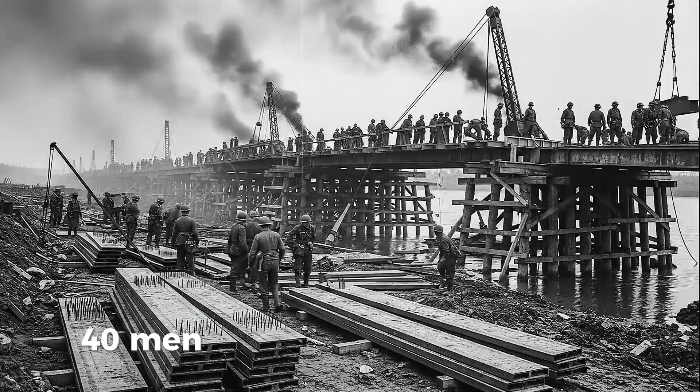June 7, 1944, 2:15 p.m., Bénouville, France. A 60-foot steel bridge slides across the Caen Canal while German artillery shells scream overhead. British Royal Engineers duck behind panels, hammers still swinging. Their commanding officer checks his watch.

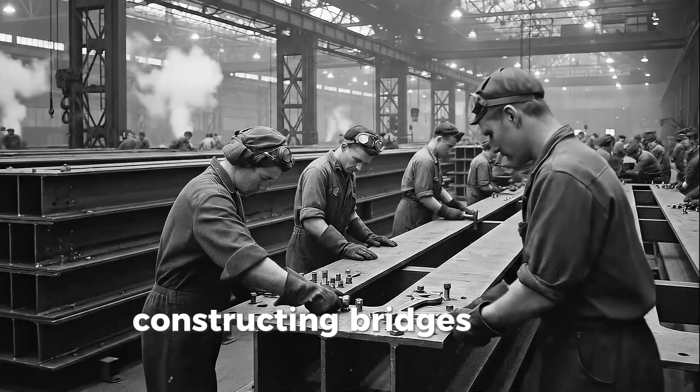But here's what makes this moment extraordinary: this bridge shouldn't exist. The technology to build it didn't exist 4 years earlier. Military doctrine said constructing bridges under enemy fire was suicide. Every military textbook of the 1930s declared it impossible.

Yet by the end of World War II, Allied engineers would build over 3,000 of these bridges, totaling 55 miles of roadway across rivers, valleys, and bomb craters. Field Marshal Bernard Montgomery would later declare, 'Without the Bailey Bridge, we should not have won the war.' This is the story of how one civil servant sketched a design on the back of an envelope and created the most important piece of military equipment you've never heard of.

A bridge so simple that factory workers with 0 engineering experience could build the parts, so portable that 6 men could carry each section, so strong it could hold a 40-ton tank, and so fast to assemble that combat engineers could throw it across rivers while bullets tore through the air around them. The Bailey Bridge didn't just change how armies crossed water, it changed how wars were won.

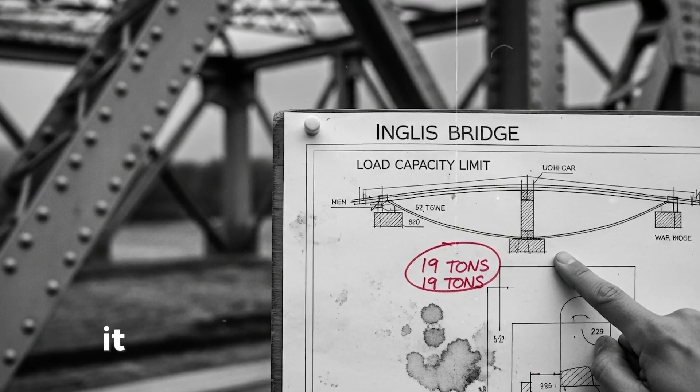To understand why the Bailey Bridge was revolutionary, we need to go back to 1939 and a problem that was keeping British generals awake at night. The British Army had a bridge called the Inglis Bridge, inherited from World War I, and it had one catastrophic flaw: it could only carry 19 tons.

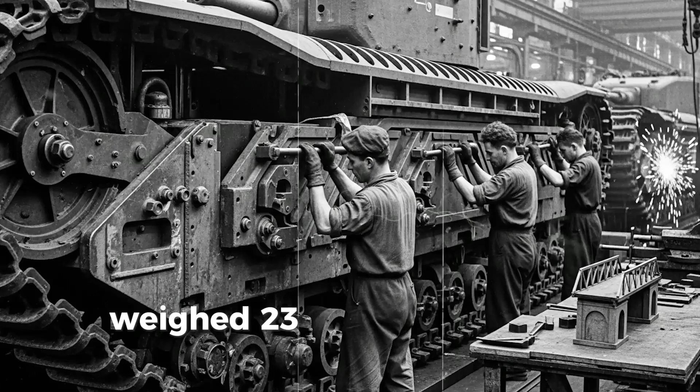That sounds reasonable until you learn that Britain's new Matilda tank weighed 23 tons. The Churchill tank, still in development, would weigh 40 tons. Every modern military vehicle was too heavy for the standard military bridge to carry. But the problem went deeper than weight capacity.

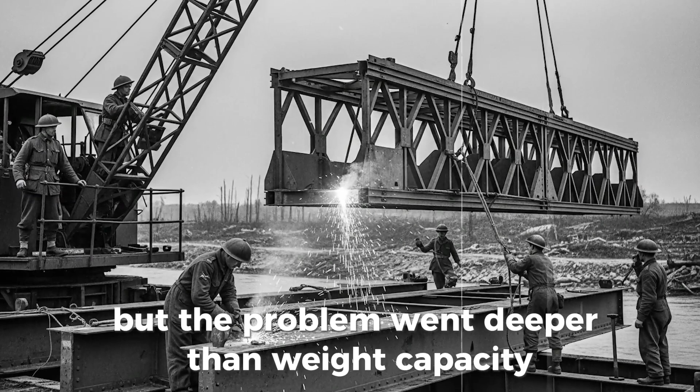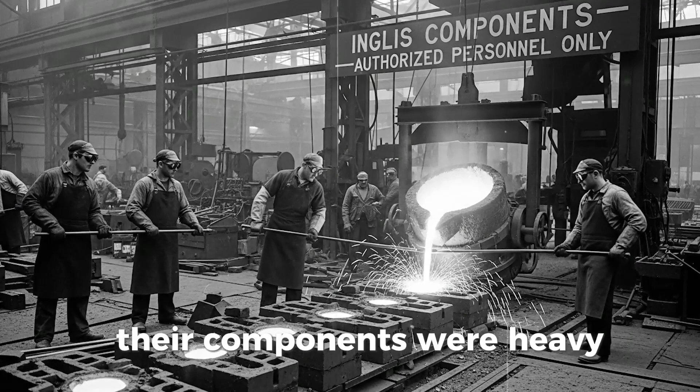Existing bridges required massive cranes to lift pre-assembled sections into place. They took days to construct. Their components were heavy, specialized, and could only be built by experienced steel fabricators. When retreating armies destroyed bridges, advancing forces faced a brutal choice: find another route or wait days for engineers to build a replacement while the enemy escaped.

In 1940, as Nazi Germany demonstrated the devastating effectiveness of rapid armored warfare, this became an existential problem. Blitzkrieg worked because German forces moved fast. If British and American armies couldn't keep pace, they couldn't win.

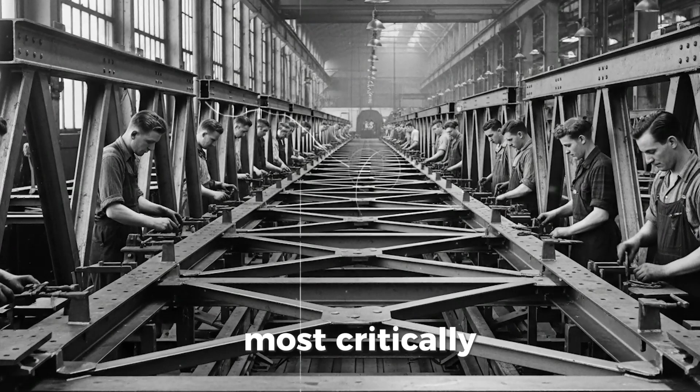The British War Office issued a specification that seemed impossible to fulfill. They needed a bridge that could be assembled by regular soldiers using only hand tools. Every component had to be light enough for men to carry without machinery. The parts had to be mass-produced by factories with no specialized experience. Most critically, it needed to be strong enough to carry a 40-ton tank across a 200-foot gap.

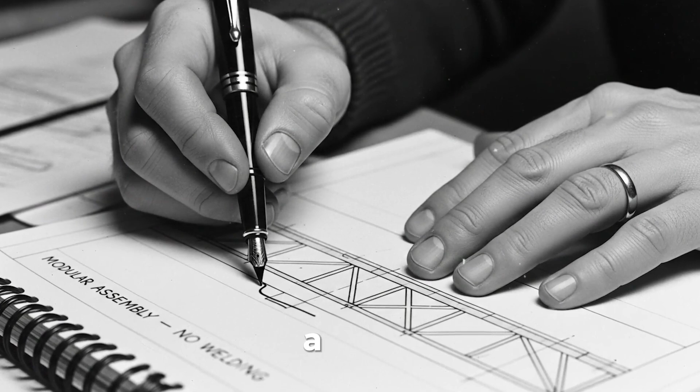Engineers called it a fantasy. One prominent military contractor told the War Office, 'What you're asking for violates the laws of physics.' But there was one man who disagreed: a quiet, unassuming civil servant named Donald Coleman Bailey, and he had an idea he'd been thinking about for years.

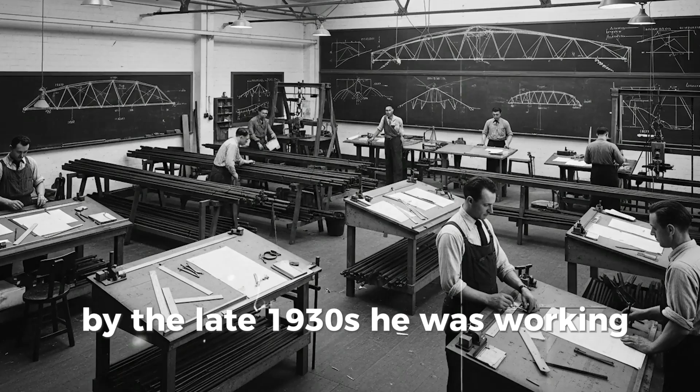Donald Bailey was born September 15, 1901, in Rotherham, Yorkshire. He studied civil engineering at Sheffield University and spent years working on reservoir construction. By the late 1930s, he was working for the Experimental Bridging Establishment, a small government research organization with a tiny budget and an impossible mission: modernize Britain's obsolete military bridging equipment.

Bailey was not a typical engineer. While his colleagues designed elaborate bridge systems using advanced materials and complex assembly methods, Bailey approached the problem differently. He asked himself, what if, instead of making the bridge more sophisticated, we made it simpler?

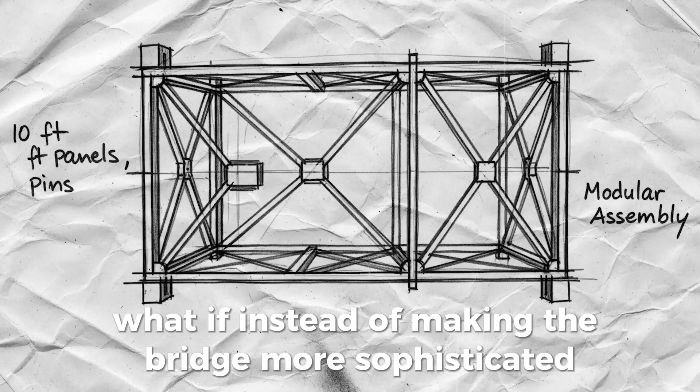The breakthrough moment came in 1940. According to witnesses, Bailey was being driven to a meeting of Royal Engineers when he pulled out an envelope and started sketching. By the time the car arrived, he had drawn the fundamental concept that would change military engineering forever.

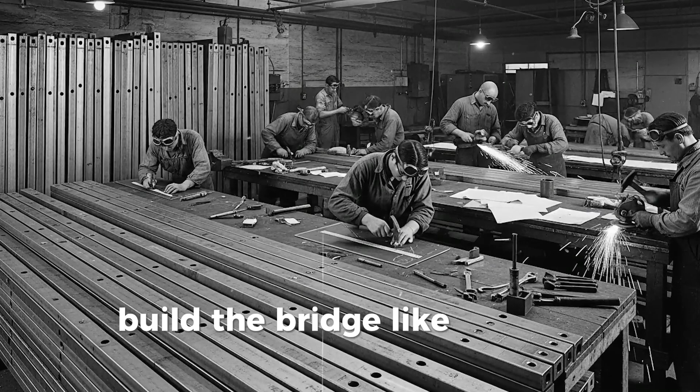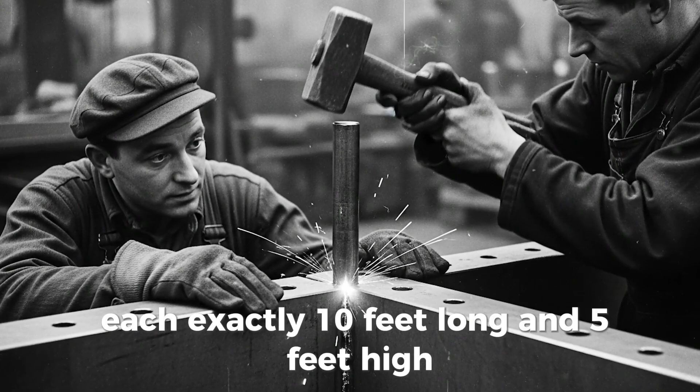His idea was deceptively simple: build the bridge like a child's construction toy. Bailey proposed creating standardized panels, each exactly 10 feet long and 5 feet high, made from welded steel in a cross-braced rectangular pattern. These panels would have holes at each corner. Engineers would connect the panels side by side using simple steel pins hammered into the holes, building the bridge's supporting walls. Wooden planks laid across steel transoms would create the roadbed.

The genius wasn't in any single innovation, it was in the system. Every component was interchangeable, every piece simple enough to mass produce, every part light enough for 4 to 6 men to carry. And most critically, the bridge could be strengthened simply by adding more panels, stacking them horizontally or vertically, depending on the load requirements.

The War Office was skeptical. One official told Bailey, 'It looks like something from a toy shop, not a battlefield.' But Bailey had calculated the load-bearing capacity down to the last rivet. On February 14, 1941, the Ministry of Supply gave Bailey an ultimatum: build a full-scale working prototype by May 1st, or the project would be canceled. Bailey had less than 3 months to prove his envelope sketch could become reality.

What happened next stunned everyone. Bailey assembled a team, including bridge designer Ralph Freeman, who had engineered the Sydney Harbour Bridge in Australia. Working around the clock at the testing facility in Christchurch, Dorset, they fabricated the first full-scale panels and built a test bridge across a field.

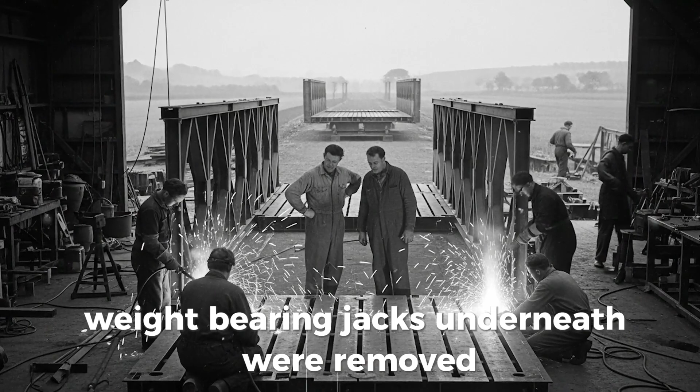Now came the stress test. Engineers drove a World War I Mark V tank onto the bridge and parked it in the middle of the span. Weight-bearing jacks underneath were removed. The bridge held. They loaded smaller tanks onto a platform built on top of the Mark V. The bridge still held. Finally, they filled the Mark V with scrap iron until it weighed far more than any modern tank. The bridge didn't budge.

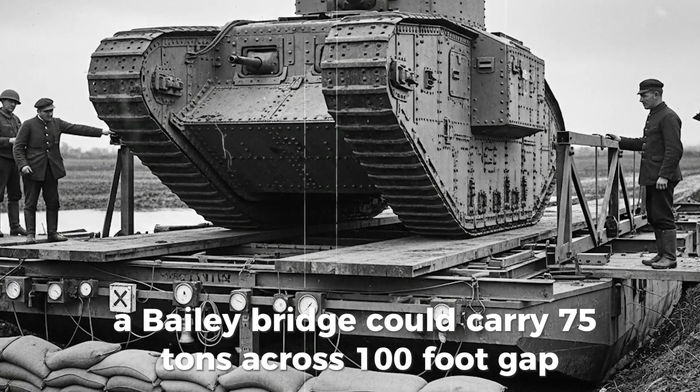But the real breakthrough came when they calculated the numbers. By stacking panels two high and two wide, a Bailey bridge could carry 75 tons across a 100-foot gap. Triple the panels, and it could support even heavier loads across longer distances. And because each panel weighed just 570 pounds, 4 to 6 men could lift and position it without machinery. Most critically, the bridge could be strengthened simply by adding more panels, stacking them horizontally or vertically, depending on the load requirements.

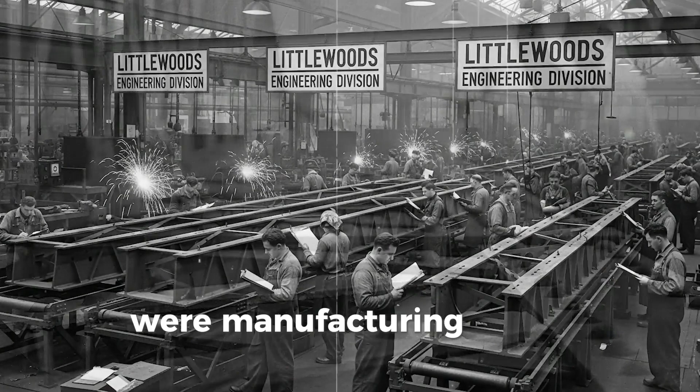In July 1941, full production began. By December 1941, the first Bailey bridges entered military service. Within months, over 650 British firms, including the Littlewoods department store chain, were manufacturing bridge components. Production eventually reached 25,000 panels per month.

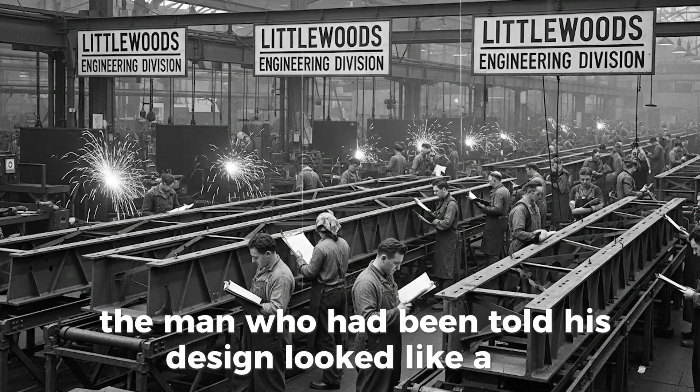The man who had been told his design looked like a toy had just created one of the most important weapons of World War II. And he'd done it with a sketch on an envelope and faith in simplicity.

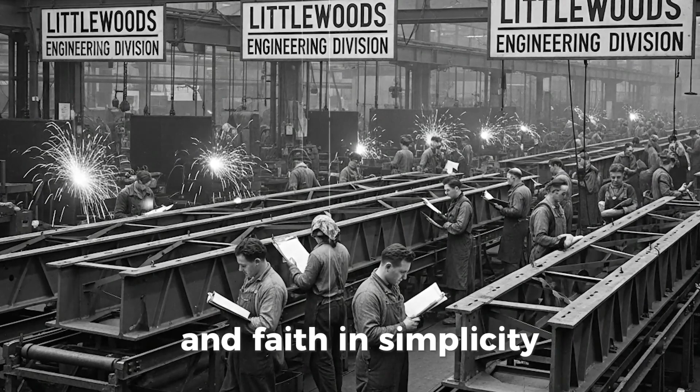The first operational Bailey Bridge went up on the night of November 26, 1942, over the Medjerda River near Medjez El Bab in Tunisia, built by the 237th Field Company of the Royal Engineers. But the first Bailey Bridge built under direct enemy fire came in Sicily, at a town called Leonforte, constructed by members of the 3rd Field Company, Royal Canadian Engineers.

German forces held the high ground. Machine gun fire raked the construction site. Mortar shells exploded across the riverbank, and yet the engineers kept building.

This became the pattern repeated hundreds of times across North Africa, Sicily, Italy, and eventually Western Europe. As German forces retreated, they systematically destroyed every bridge, mined every road, and turned every river crossing into a killing zone. The Wehrmacht's strategy was simple: if we can't stop them on the battlefield, we'll stop them at every river.

But they hadn't counted on the Bailey Bridge and the engineers willing to build it under fire. Edmund McNeill, a warrant officer with the 284th Engineer Combat Battalion, 9th Infantry Division, described the reality of Bailey Bridge construction under combat conditions. His words paint a picture far removed from the clean engineering diagrams.

When you're building the thing, the Germans are throwing mortar shells on top of you all the time. It wasn't a smooth operation. There was always a problem, especially when a plane came over and dropped a bomb on the damn thing, right when we were halfway through building it. Or they'd machine gun us, or we'd run into mines.

The construction process required brutal efficiency. Engineers would arrive at a destroyed bridge site, often still under German observation. While infantry units provided covering fire, bulldozers cleared approaches to the riverbank. Engineers laid out rollers, metal tracks upon which the bridge sections would be pushed forward across the gap.

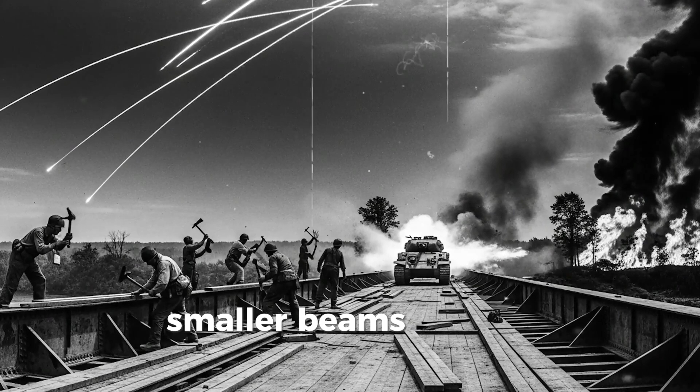The assembly began with the launching nose, a lighter angled section that would extend out over the water or gap. Behind it, crews assembled the first full section: 2 vertical panels on each side, connected by transoms, the horizontal beams running across the width. Stringers, smaller beams running lengthwise, were laid across the transoms. Finally, wooden chesses, planks 12 feet long, were placed across the stringers to form the actual road surface.

One section complete. Nine more to go for a 100-foot bridge. And the Germans are still shooting.

McNeill continued: All you'd hear, beyond the hammering, were the sergeants, 'Get that, wham that, hit that. Don't you know how to hit that?' The sledgehammers would be going like crazy. You're slamming pins in all over the place. You didn't have to tighten up any bolts or anything, you just bang them all in there.

But the real danger came from the relentless precision required. You always wore your helmet, always, because if you fell, you were falling on steel. A man would fall overboard. We'd get him and pull him up, and he'd have a bullet hole in him. That happened. German machine guns would wipe out 4 or 5 guys standing on the bridge.

The engineers developed brutal pragmatism. Work never stopped for casualties. Men would step over their wounded comrades to continue hammering pins. If a section was destroyed, they'd rebuild it immediately. Speed wasn't just about military advantage, it was about survival. The faster you finished, the sooner you stopped being a target.

Some bridges took 3 to 4 hours under ideal conditions with 40 men. Others took 2 days under heavy fire. The record for an 80-foot Bailey Bridge was set by the 1st Canadian Division Engineers: 1 hour and 8 minutes from first panel to trafficking tanks. June 6, 1944.

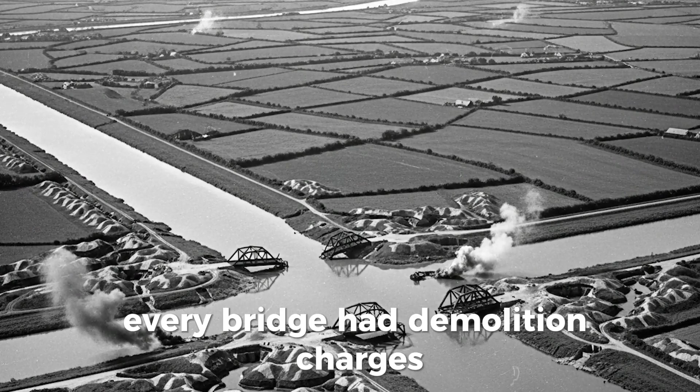As Allied troops stormed the beaches of Normandy, Royal Engineers were already preparing for the next phase. Getting off the beach was only the beginning. To push inland, armies needed to cross the Caen Canal, the Orne River, and dozens of smaller waterways crisscrossing the French countryside. German forces had prepared for this. Every bridge had demolition charges. Every river crossing had observation posts calling in artillery fire. The Normandy bocage, with its dense hedgerows and sunken lanes, turned every 100 yards into a potential killing ground.

In the pre-dawn hours of June 6th, British paratroopers had conducted a daring glider assault to capture intact two bridges, Pegasus Bridge over the Caen Canal and Horsa Bridge over the Orne River. Led by Major John Howard, the assault succeeded. But these bridges alone weren't enough. The entire Allied advance depended on rapid bridge construction to get armor and supplies flowing inland.

The Bailey Bridge's modular design proved perfect for Normandy's challenge. German forces had destroyed most bridges, but often left the stone or concrete piers intact. British and American engineers could quickly measure the gap, calculate the required panels, truck in the components, and build a crossing in a fraction of the time traditional bridging would require.

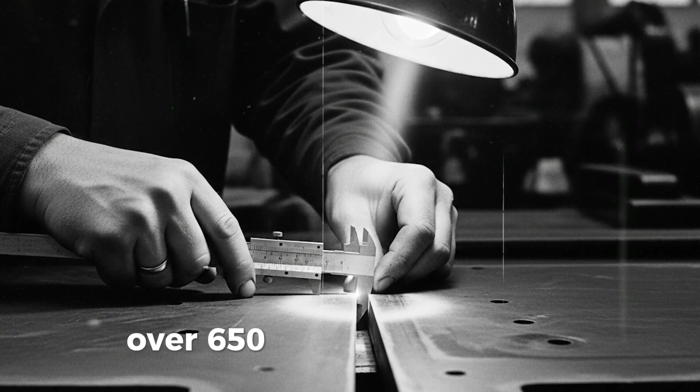The production side had its own challenges. British quality control was extraordinarily strict because lives depended on interchangeability. If a panel manufactured in Birmingham didn't fit perfectly with transoms made in Coventry, soldiers would die trying to make it work under fire. Over 650 firms across the UK manufactured Bailey components, each operating under rigid specifications to ensure every piece from every factory was identical.

The Americans initially struggled with this. In 1944, the U.S. 31st Engineering Regiment discovered that several hundred American-made Bailey panels were either slightly too large or too small. The problem was traced to fabrication gauges, whose precision had been ruined by poor handling. Some 850 American-built Bailey kits had to be tracked down and marked as standalone types, never to be mixed with British or properly manufactured American components. It was an embarrassing reminder that precision engineering tolerances mattered as much as combat courage.

Yet despite these challenges, the Bailey Bridge worked. And it worked so well that Field Marshal Bernard Montgomery, commander of British forces in Northwest Europe, issued a remarkable statement in 1947. Bailey bridging made an immense contribution toward ending World War II. As far as my own operations were concerned, with the 8th Army in Italy and with the 21st Army Group in Northwest Europe, I could never have maintained the speed and tempo of forward movement without large supplies of Bailey bridging. Without the Bailey Bridge, we should not have won the war. It was the best thing in that line that we ever had.

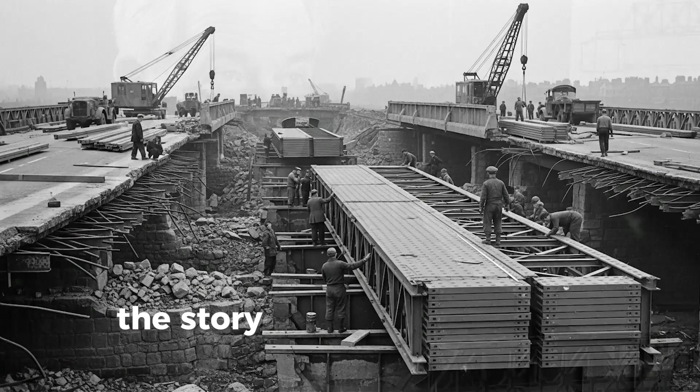Donald Bailey, the quiet civil servant who sketched a design on an envelope, was knighted in 1946. He received £12,000 from the British government, a modest sum for a man who had helped win a world war. Bailey lived until 1985, long enough to see his bridge become the global standard for rapid bridge construction in military and civilian applications worldwide.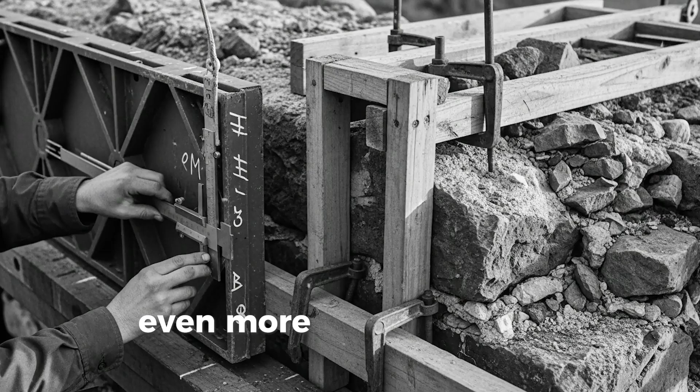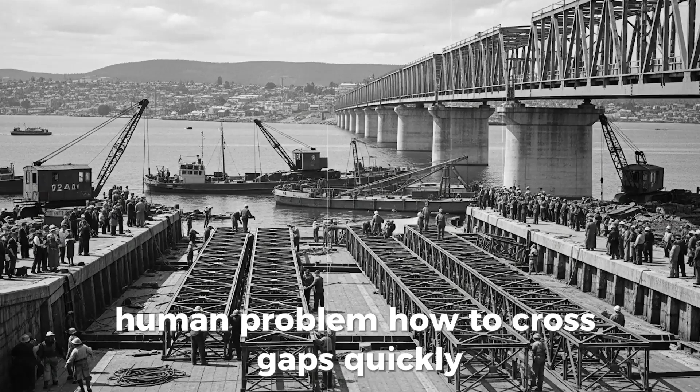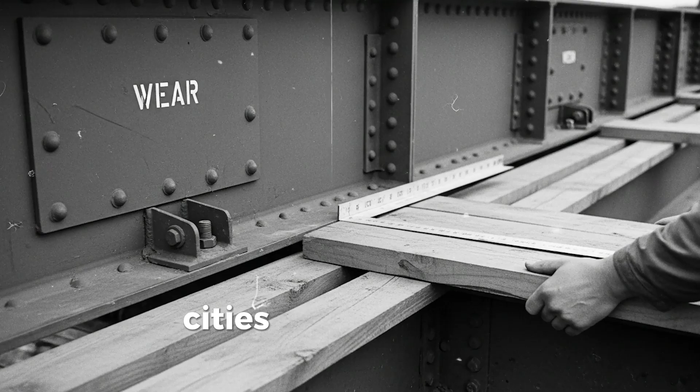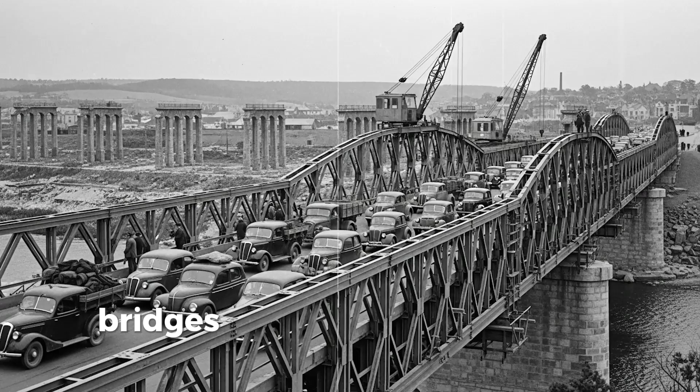The story of the Bailey Bridge didn't end in 1945. If anything, the post-war decades proved that Donald Bailey had created something even more valuable than a military weapon. He had invented a universal solution to a fundamental human problem: how to cross gaps quickly, safely, and economically. In the immediate aftermath of World War II, Bailey bridges went to work rebuilding war-torn Europe. Cities with destroyed infrastructure used Bailey components to restore river crossings while permanent bridges were reconstructed. The design's modularity meant bridges could be customized to any span, any load requirement, any environmental condition.

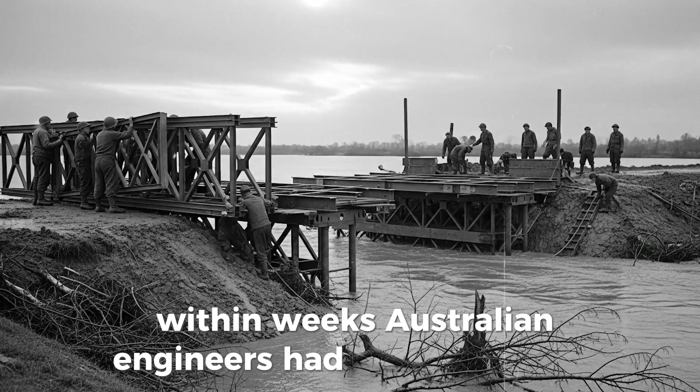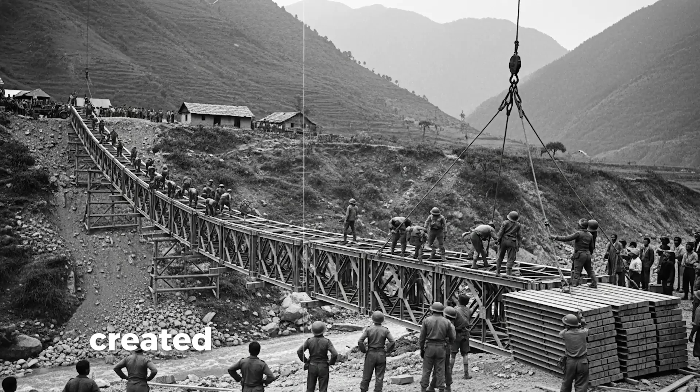Perhaps the most dramatic civilian use came in 1975, when the Tasman Bridge in Hobart, Tasmania, was destroyed when a cargo ship struck one of its piers. Within weeks, Australian engineers had assembled a 2,585-foot Bailey Bridge, the longest ever built, to reconnect the two halves of the city. The temporary Bailey remained in service until 1977, when the permanent bridge reconstruction was complete. For two years, an entire city depended on a design created for battlefield conditions.

Modern armies still use Bailey-type bridges. The design has been updated, components refined, materials improved, but the fundamental concept remains unchanged. When disasters strike, from earthquakes to floods, Bailey bridges remain the first response. They can be transported by truck, helicopter, or even airdropped. Assembly requires minimal training and no specialized equipment. A Bailey bridge can be operational in hours, not days or weeks.

India has become one of the world's largest users of Bailey bridges, employing them extensively in the Himalayan regions where mountainous terrain and monsoon conditions regularly destroy permanent bridges. The Indian Army's Madras Engineer Group has set modern records for Bailey Bridge construction, including a 190-foot span assembled in record time following devastating landslides in Wayanad, Kerala in 2024.

The core principles that made the Bailey revolutionary in 1944 remain relevant in 2025: simplicity, modularity, portability, and strength. In an era of increasingly complex technology, the Bailey Bridge stands as proof that sometimes the best solution is the simplest one.

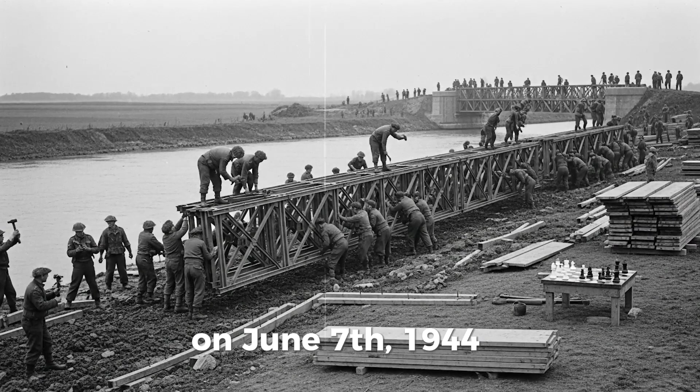On June 7, 1944, 40 British engineers assembled a 60-foot bridge across the Caen Canal while German artillery pounded their position. Four hours of hammering, 570-pound panels lifted by hand, simple pins connecting modular sections into a structure that could carry 40-ton tanks.

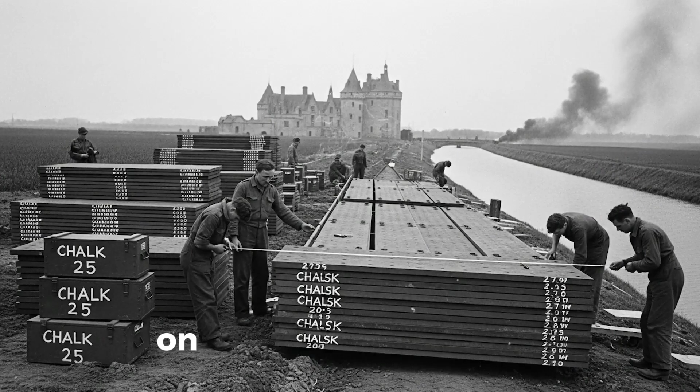That bridge, and the 3,000 others like it built across Europe, didn't just change how armies crossed rivers. They changed how wars were won. They proved that sometimes the greatest innovations come not from complexity, but from radical simplicity. That the best solutions to impossible problems often start with a sketch on an envelope and faith that good engineering requires nothing more than good thinking.

Donald Bailey never wanted fame. He never sought glory. He was a civil servant who liked bridges and believed that water obstacles shouldn't stop advancing armies. He created something so effective, so fundamentally well-designed, that 80 years later, his bridge is still being built, still saving lives, still connecting communities divided by nature or disaster.

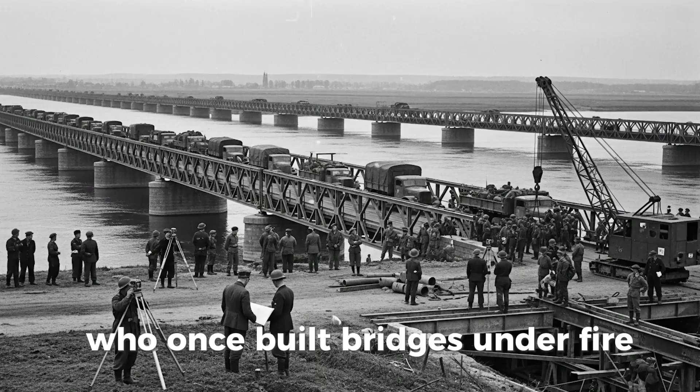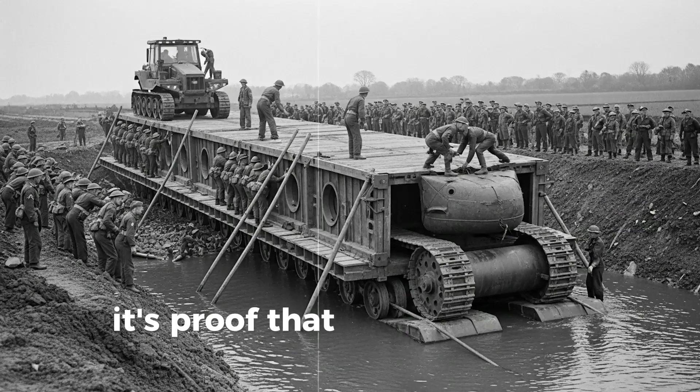The next time you cross a river, think about the engineers who once built bridges under fire. Think about the men who carried 570-pound panels while bullets flew past their heads. Think about the quiet civil servant from Yorkshire who changed the course of history with nothing more than steel, pins, and an envelope sketch. Because the Bailey Bridge isn't just a piece of military history. It's proof that when you solve problems simply, elegantly, and well, your solution can outlast armies, outlive empires, and continue making the impossible possible for generations to come.